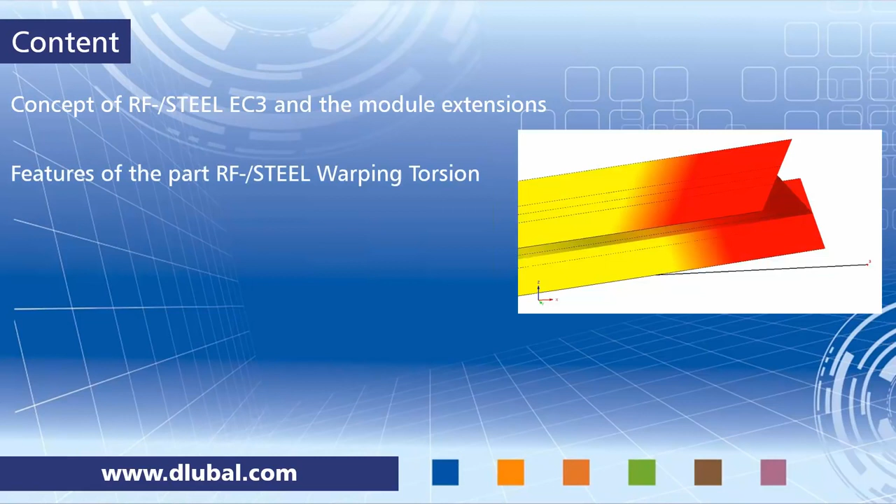We get started with the concept of the RF Steel module EC3 and its module extensions. I will then summarize a few features of the RF Steel Warping Torsion add-on module and the RF Steel Plasticity module. Then it's time for me to hand over the screen to Wieland, and he will show you an example in R-Stab, and he will perform stability design checks using the second order analysis and employing 7 degrees of freedom. He will also perform a plastic design in RF Plasticity.

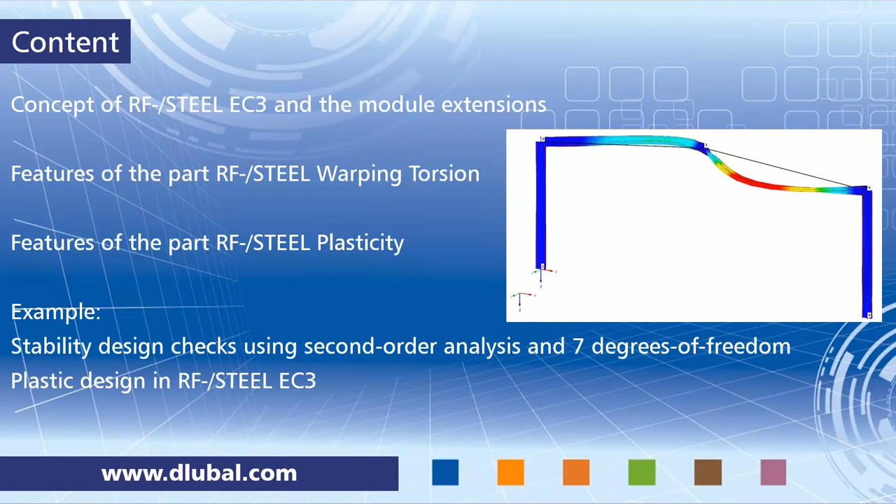Okay, let's get started with the concept. We have the add-on module RF Steel Eurocode 3, RF Steel EC3. Here you can design in accordance to the Eurocode 3. You can perform stability design checks. You can do deformation analysis, and of course you can also do some fire protection analysis. And together with this add-on module you can enable 2 different extensions.

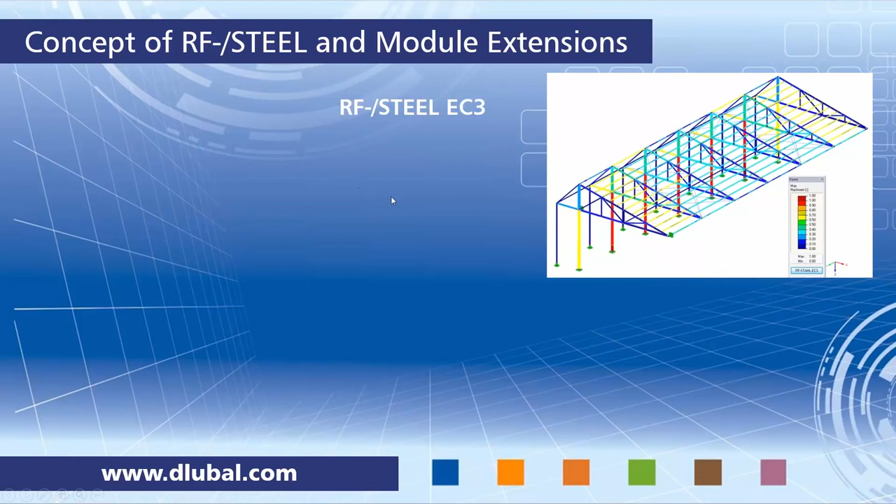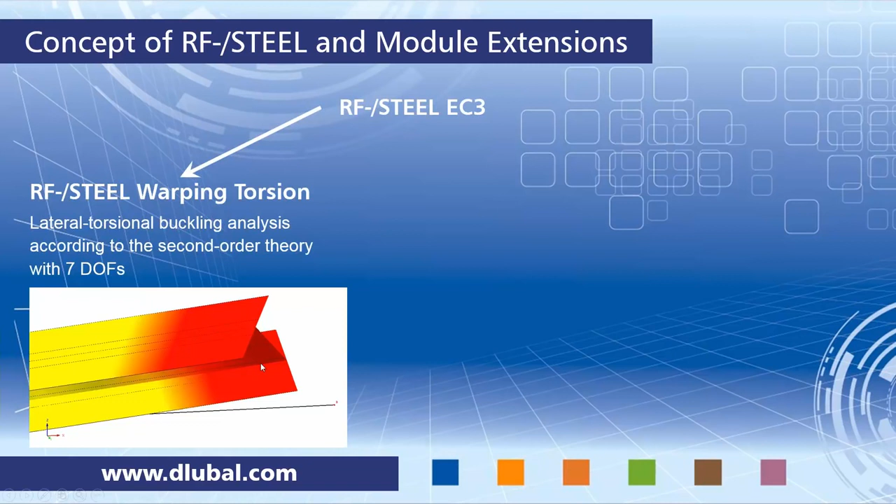One is the RF Steel Warping Torsion. Here you perform a design with the second order analysis under consideration of a 7th degree of freedom. That's Warping Torsion. And a second extension is RF Steel Plasticity. Here you can perform a plastic design of cross sections. They are both working either independently or you can use them in combination. And Wieland will show you this throughout the example.

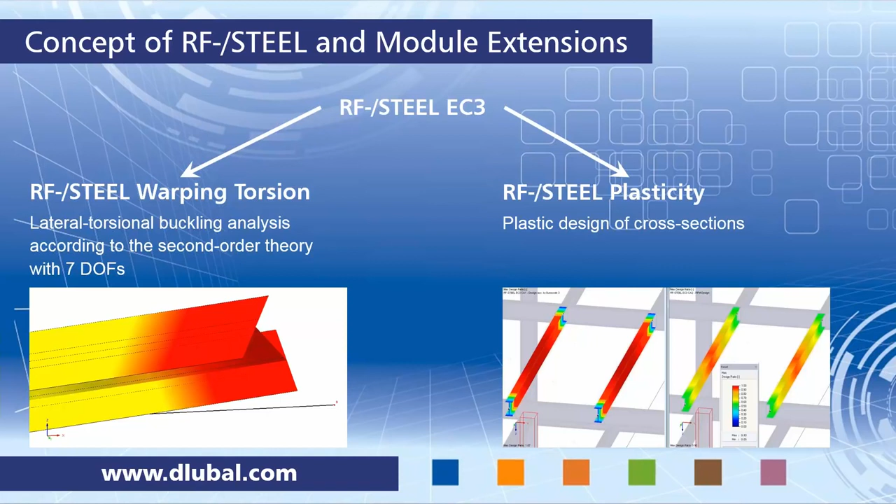To give you a bit more detail, here's a list of features of the Warping Torsion extension. So you have a standalone solver, and this is considering 7 degrees of freedom. The 7th degree is the Warping Torsion degree of freedom, beside the usual translational and rotational degrees of freedom. And it is performing a nonlinear analysis in accordance to the second order. You can enter imperfections, and in general this extension is available for thin-walled steel cross-sections.

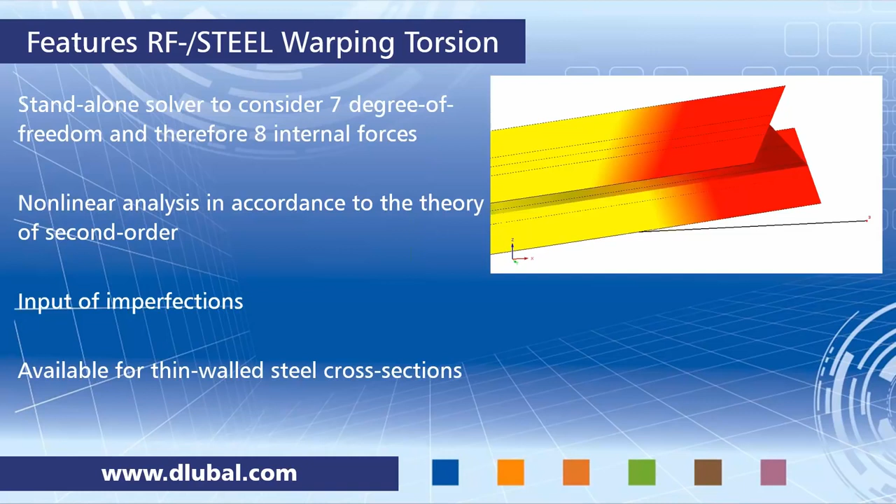For RF Steel Plasticity, we have different methods of analysis available. The main one is the partial internal force method by Kindmann and Frickel, and this method is suitable for nearly all types of cross-sections. This method exists with and without a redistribution of internal forces, and a second method available is the simplex method. This is for general cross-sections, and another type is the analytical nonlinear optimization procedure, which is used for elliptical cross-sections.

So it's now time already to hand the screen over to Wieland. He will show you all the discussed things live in R-Stab, and just a side note, everything that is shown and discussed today is available in R-Stab and RFEM. So the add-on modules shown today are available for both program families. So now I hand the screen over and enjoy the webinar.

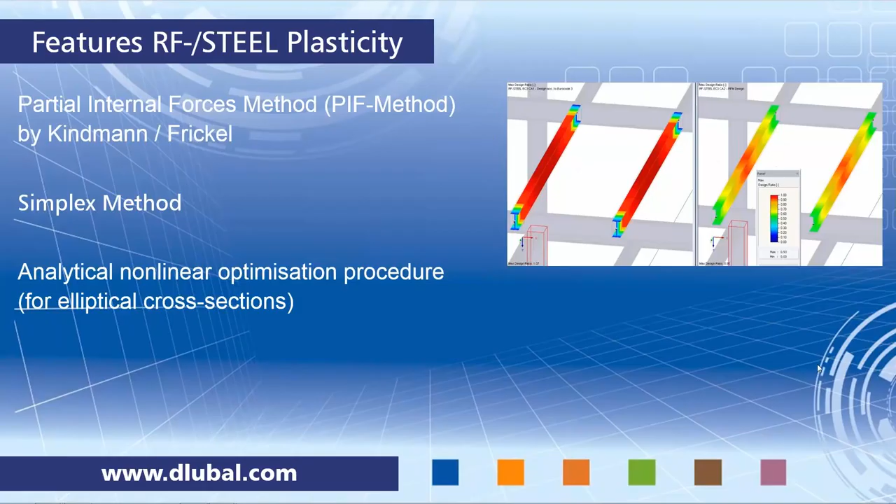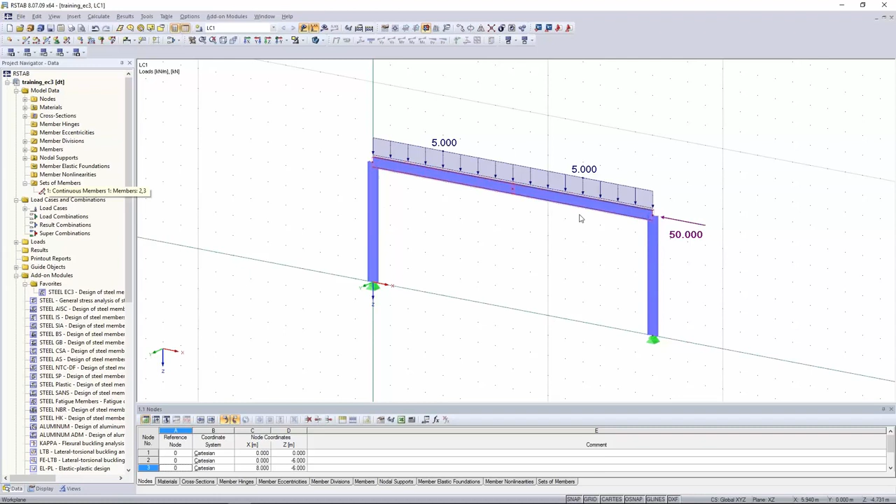So, thank you for the introduction, Gerlinde. Now it's time for the live presentation of this webinar, and I have already prepared the model to start with the Steel EC3 design. So you can see we have a very simple frame with a vertical and horizontal loading, just one load case, and I want to take a look at the horizontal beams which we want to design as a set of members. It's not just one single beam, it is divided by one node, so I had to prepare a set of members to use it as one element in the Steel EC3 design.

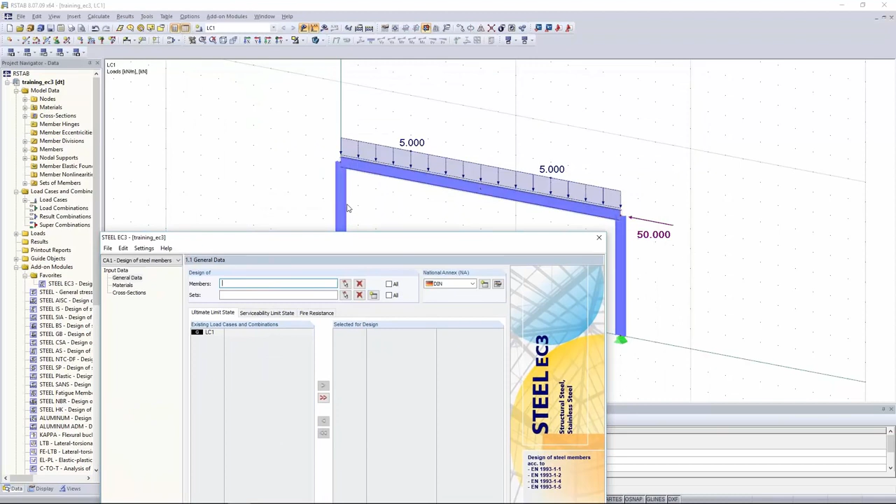Because some of you might see this module EC3 for the first time, we're going to start with just a basic design according to Eurocode 3, and then we want to upgrade to Warping Torsion and Plasticity later in this presentation. So I've opened the module Steel EC3. I have to select the load case which I want to design, which is the only one, LC1. I want to check my set of members, and today we want to design according to the EN version of Eurocode 3.

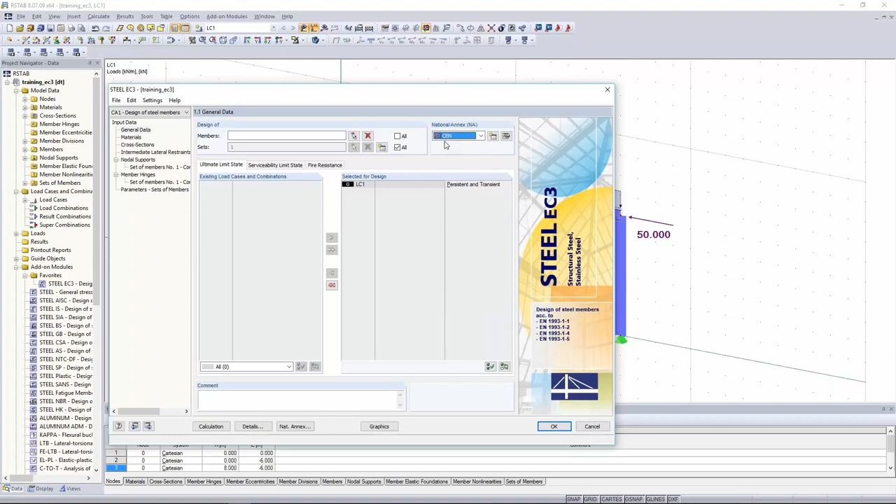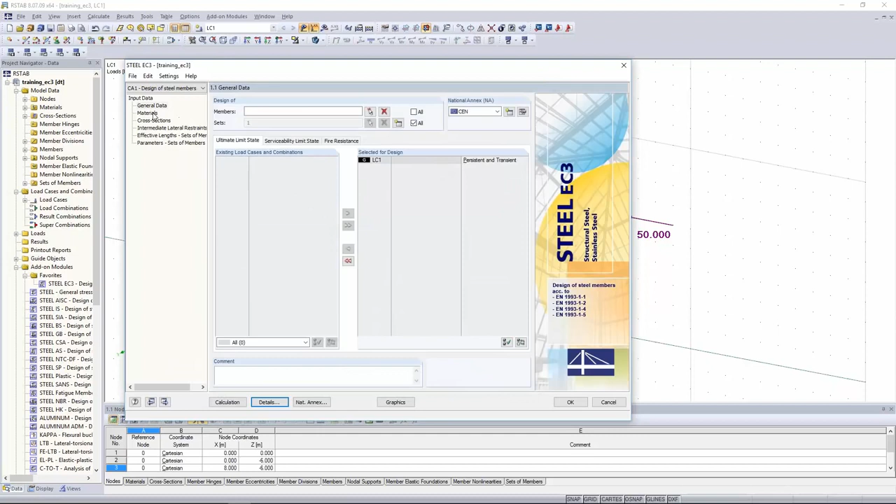In the first part of this design, I want to check this set of members not according to the general method. I want to design it according to the equivalent member method, which I can change in the stability dialog of details. Then I can continue to the next mask to check the material again, which is S235. This is fine. Cross-section is IPE 500 section.

I have no intermediate restraints on this horizontal beam, so I can skip this mask. Otherwise, you can prepare intermediate supports along this beam as you wish.

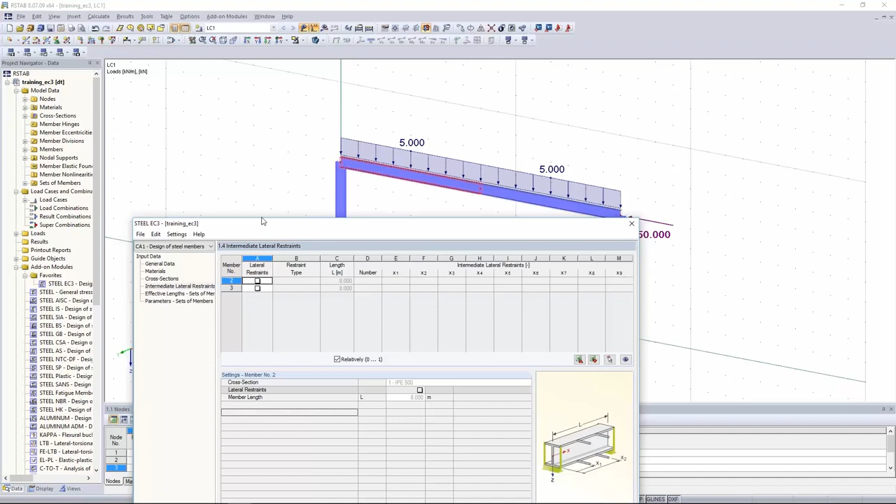In the next mask, which is effective lengths, you can define all the settings for buckling about the y-axis, buckling about the z-axis, and lateral torsional buckling in these columns. We want to keep it simple and design it as a simple fork-supported set of members. So all of these settings are already fine. We have buckling length factors of 1.0 in both directions, and the beam is simply fork-supported.

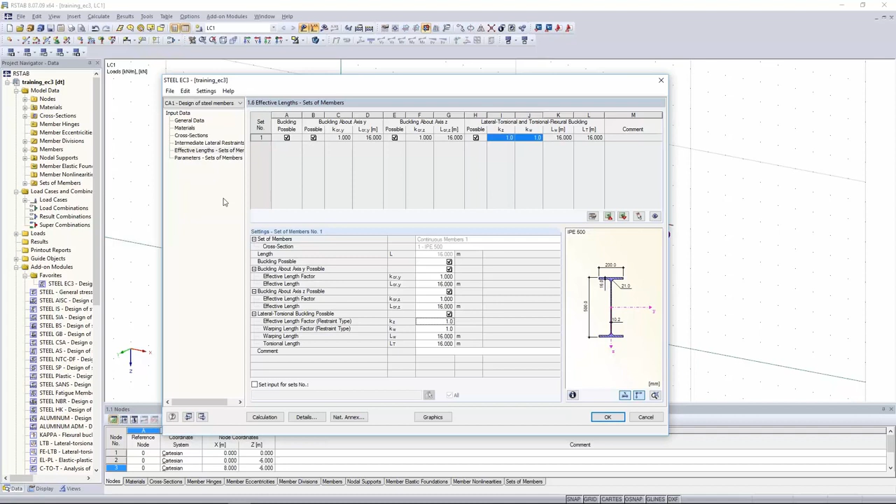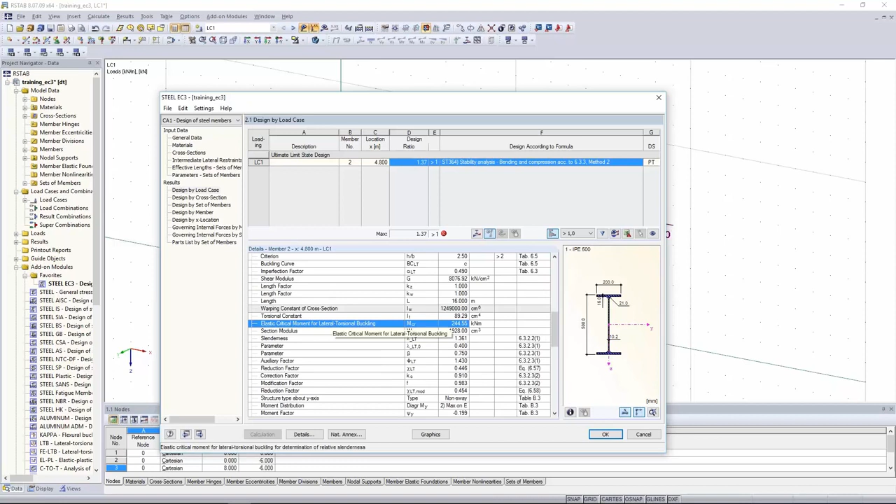So now I can just run the calculation, and you will see we have an overloaded horizontal beam, horizontal set of members here. We have a cross-section class 3, and you can check all the partial results in the design table on the bottom. So you have a part of the cross-section classification. You can see the critical buckling loads over there, and you can check almost every intermediate result in this table. You can export it, and also you can take a look in the graphic to check the results.

So there we have a class 3 section. I think this is at the x-location where there's no bending moment. Yes, so we have only compression force, and that's why the IPE section is assigned to class 3.

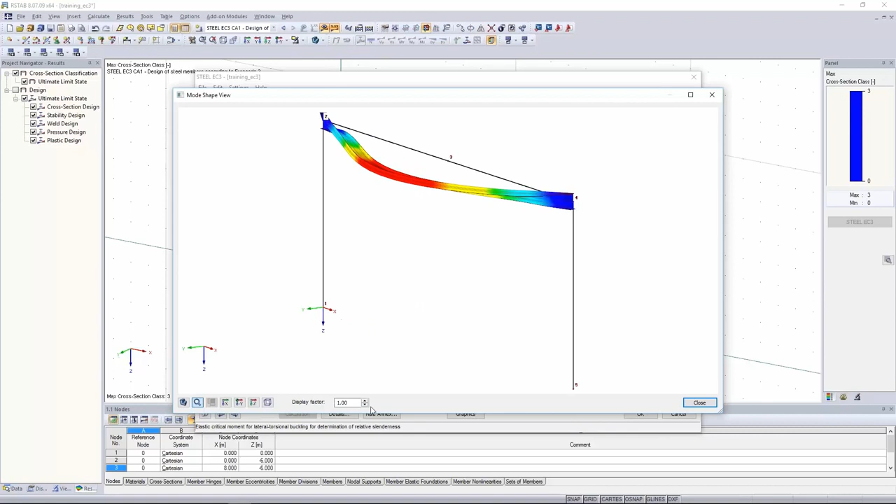Let's get back to the design module. If you want to check the eigenvalue solver, which is inside this module, to get the critical bending moment, M critical, you can click this button here, mode shapes, and you can see that there we have a lateral torsional buckling eigenvalue or eigenmode.

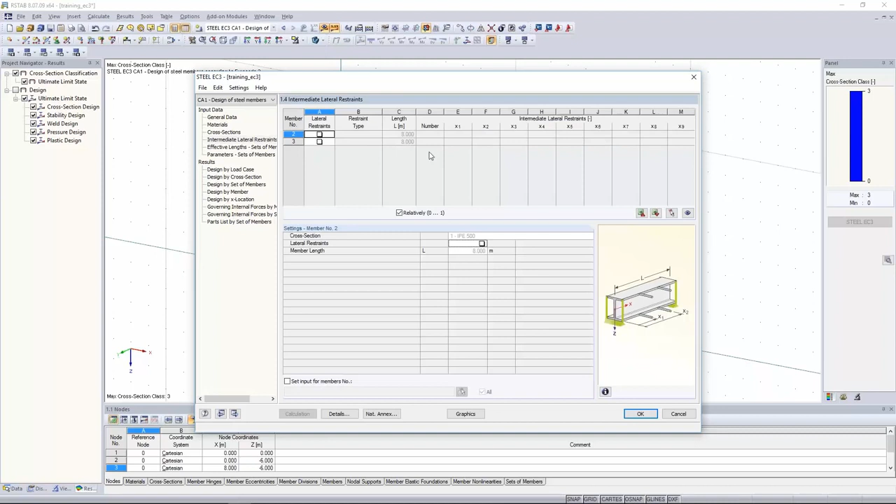And now the question is, how can I design this structure, or how can I stabilize it? Therefore you have several options. As I've said, you can place intermediate restraints as you wish, or in this example I want to show you the rotational restraint or the shear panel. For this example I will take the rotational restraint, and therefore you can change to the component description over there.

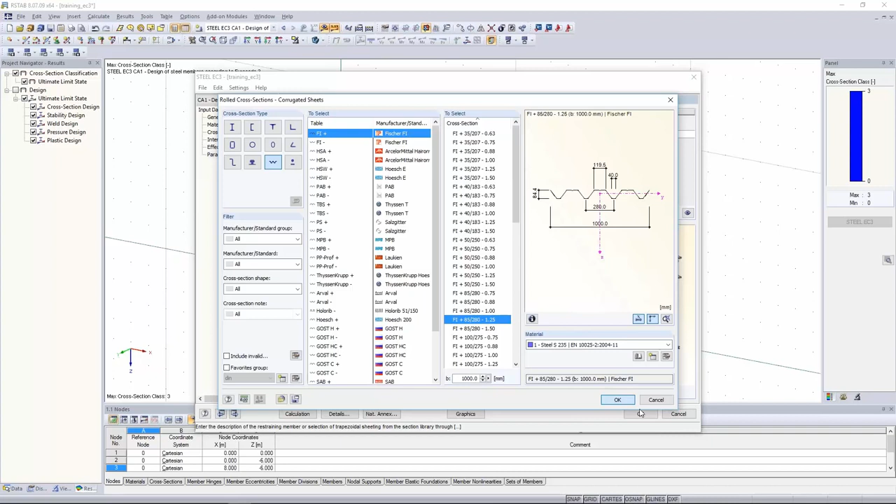And we want to take a trapezoidal sheet into account, which I can easily pick from the database. Let's say this is a Fischer trapezoidal sheet, 85/280, 1.25 thickness. That's fine. Okay. And the module will take into account all these values automatically. You just have to define a beam spacing, and maybe you want to change the C100 value according to Eurocode 3 Part 1-3.

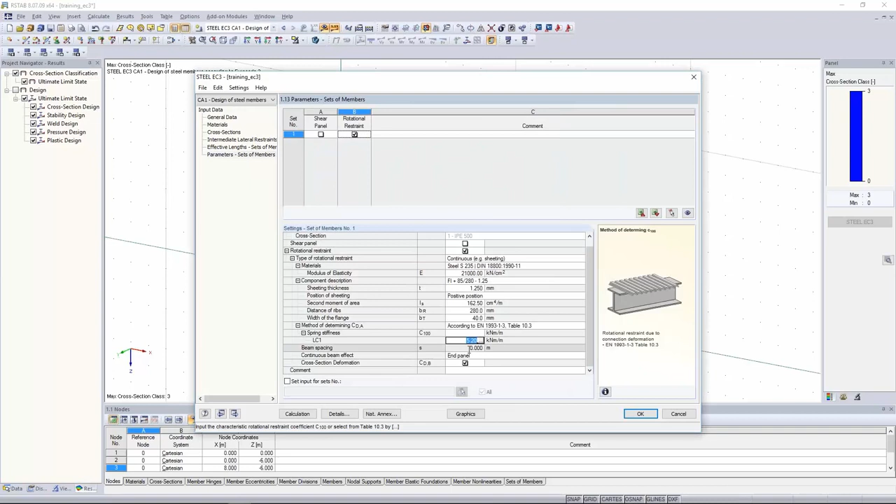Okay, I want to have a beam spacing of 5 meters, and then I can run the calculation again, and now you can see that this structure is already stabilized. We have a fulfilled design, and this is fine. You can also check the partial results of the rotational restraint over there up to the total rotational spring stiffness.

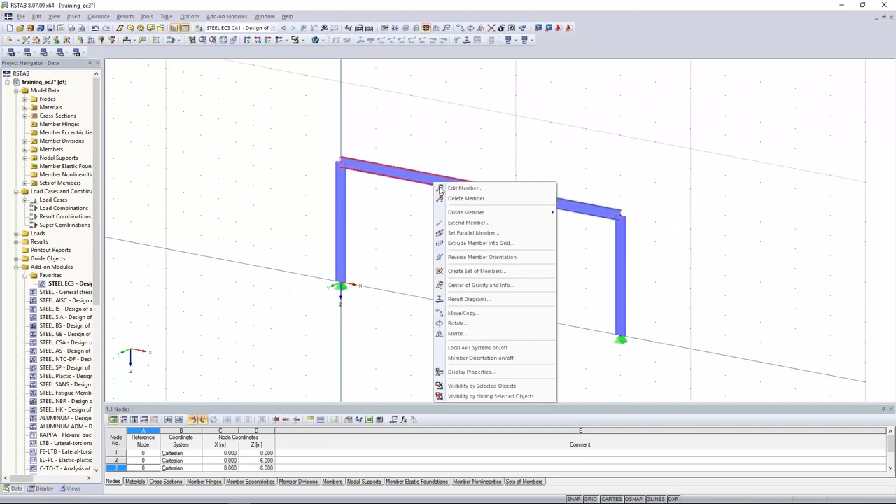All right. In the next step, I want to make a small change in the structure because I need some more space at the connection of the beam to the column. I want to prepare a taper at the beginning and at the end of the beam. Therefore, I just right-click on the member, edit member, right-click, divide member by distance, and I can easily change this value to 1 meter and this one to the same, divide member by distance at the end, 1 meter.

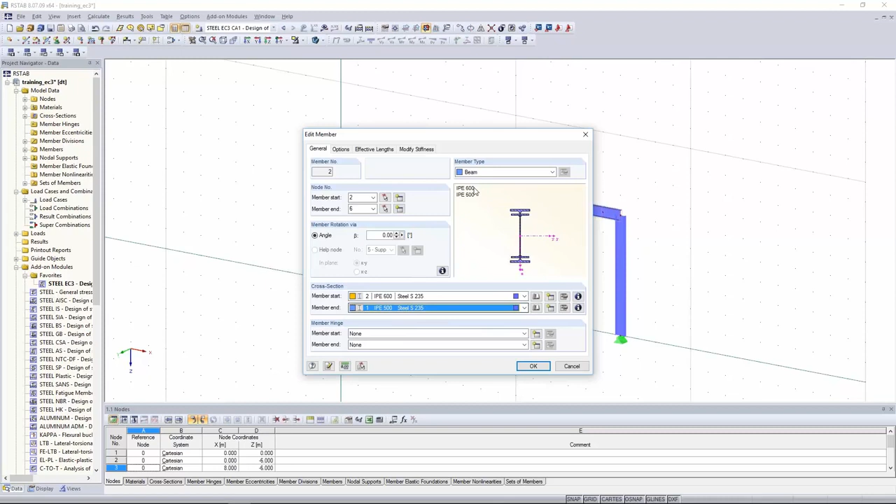To define the taper, I can just change the cross-section at the beginning, IPE 600 now, and IPE 500 at the end, and the program will automatically define the taper over there. Same thing on the right side, not at the column, on the beam. IPE 600 section at the end of the beam. Now I want to run the design again.

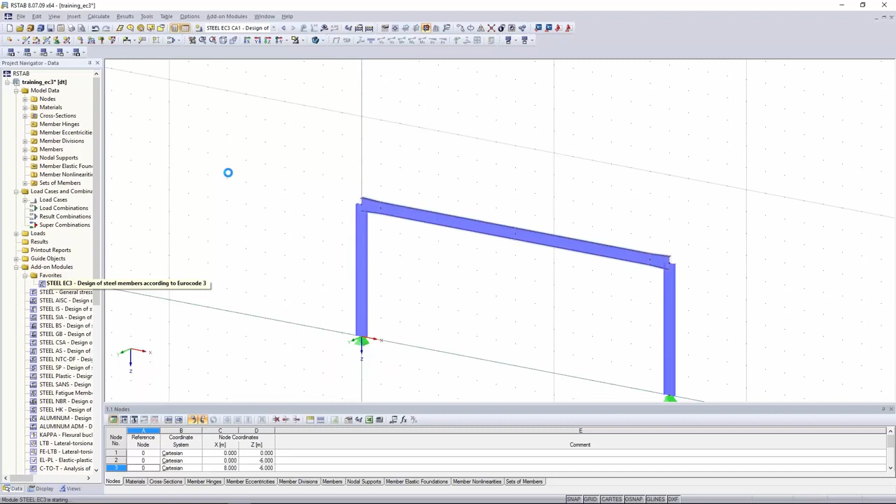The question is, in the first design we had a design according to the equivalent member method. We had bending and compression, and this is according to chapter 6.3.3 of Eurocode 3. And this chapter is only valid for uniform members. Now we have a tapered member, and we have to change this because it's not valid anymore. If you have a taper, you can use the general method.

Click on OK, and you will see for the set of members, it changed automatically to nodal supports. And this is a different method from the last one. It's not the equivalent member method. General method means you have a design according to chapter 6.3.4 of Eurocode 3, and therefore we have to place some nodal supports to get the equivalent system for the eigenvalue.

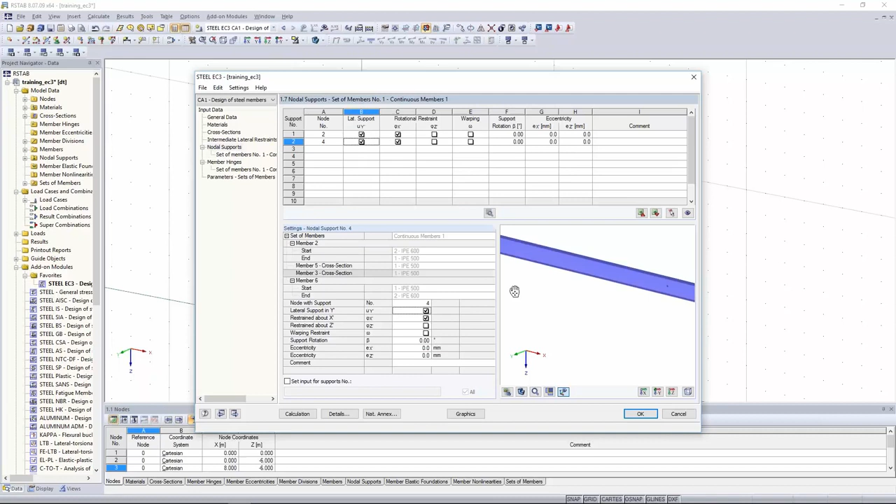You can check these nodal supports graphically in this view. As you can see, we have the whole frame over there, but by clicking on local coordinate system, you can change the view to the nodal supports, and you can check them. But in my example, these default nodal supports are already fine, and I can just design this set of members

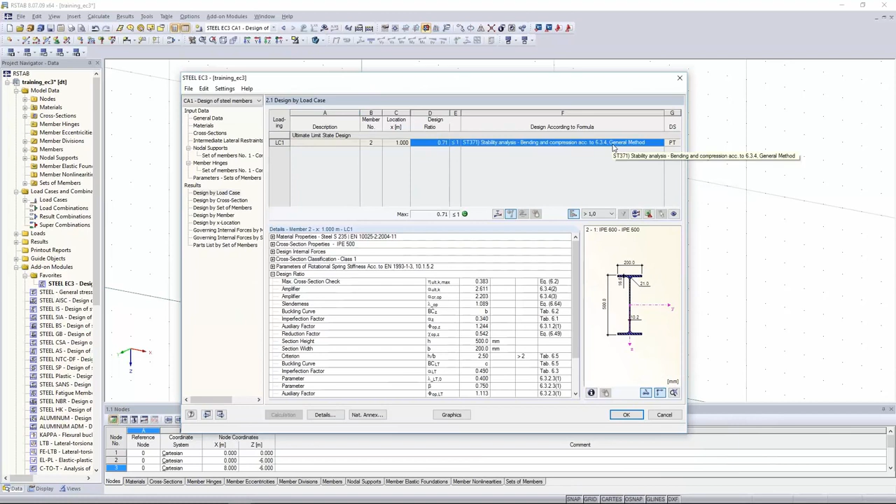by clicking on calculate. So also for the tapered member, we have a design according to the 6.3.4 general method, which looks a bit different. There's a small issue with the graphic there, but as you can see, it is also possible to have a design for tapered sets of members.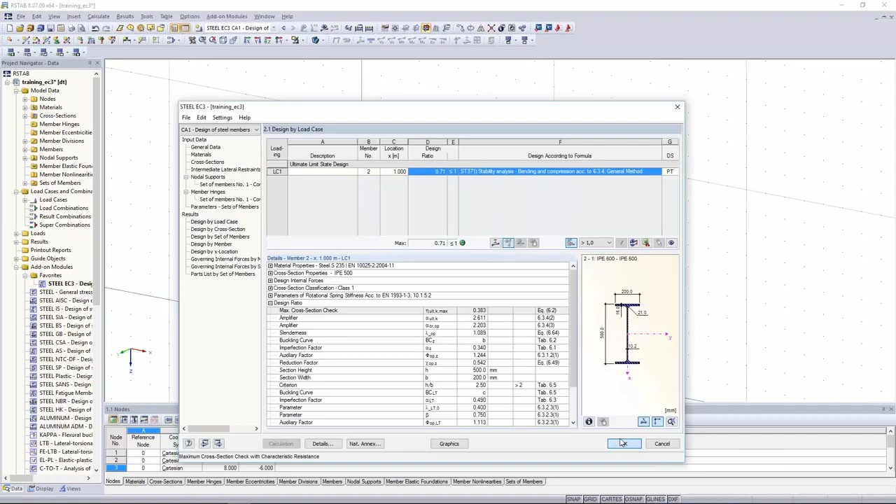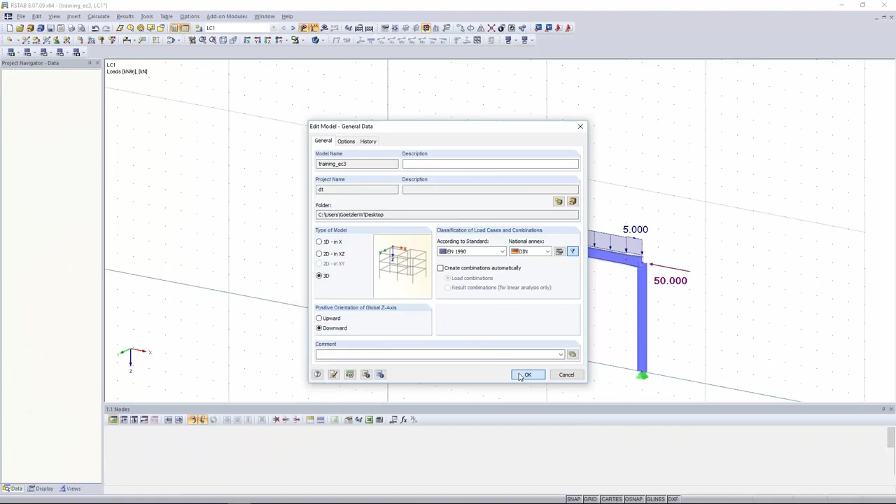Now we have to address a more specific problem of the structure. We don't just want to define the transverse loading and the horizontal loading, we also want to take some cross-bending into account, and therefore I right-click on General Data, change the structure to 3D, and have to define some nodal supports to support the frame out of plane.

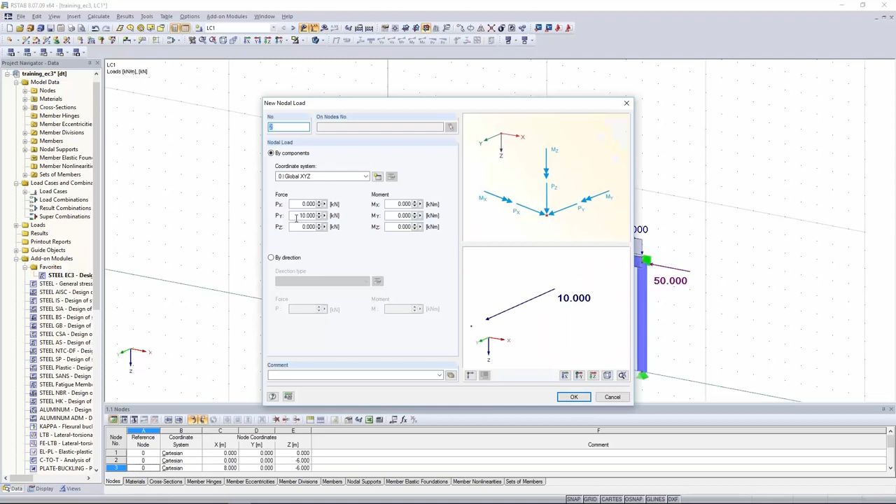And therefore I can just define the loading out of plane, which is 10 kilonewton in this example, in the center of this horizontal beam, which is quite a bad loading in this position, but we will see how to define it, how to design it.

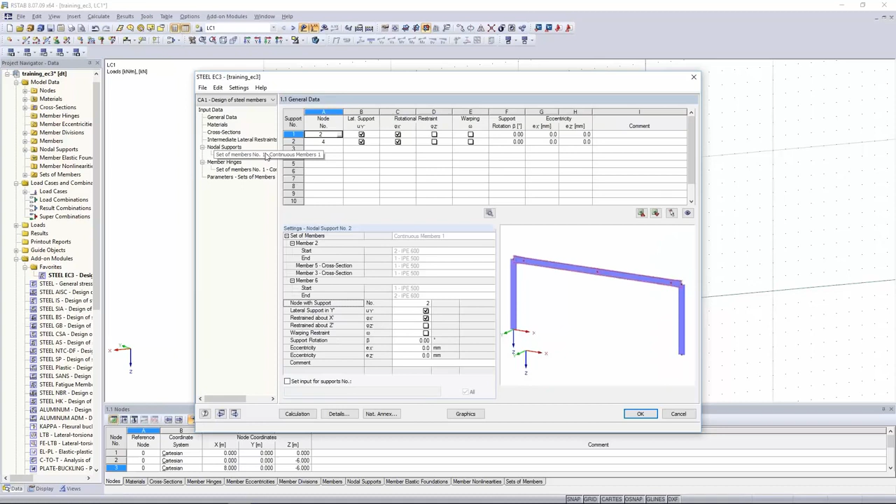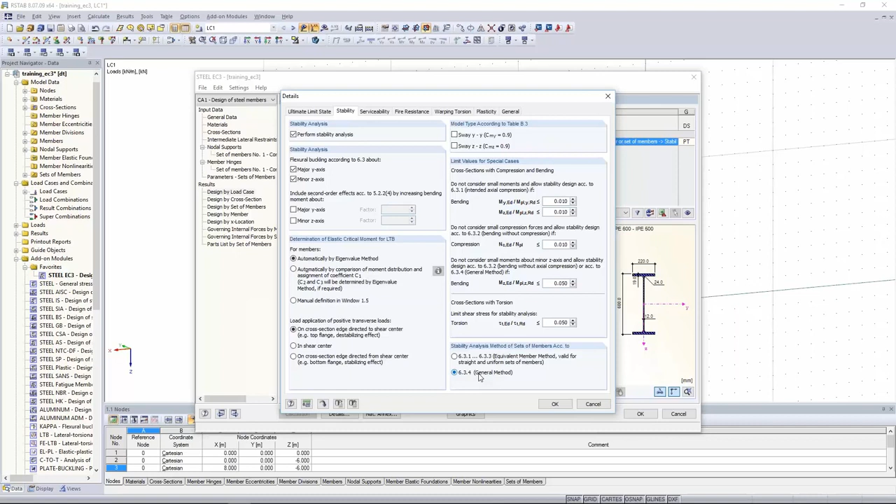First of all, we want to try to do the same analysis again, just by running the calculation again. But there's a warning message coming up, which says that there's a moment about the z-axis, of course, and this is not allowed for this design method. Yeah, the design according to chapter 6.3.4 allows only a loading in plane, and this bending moment Mz is due to a loading out of plane.

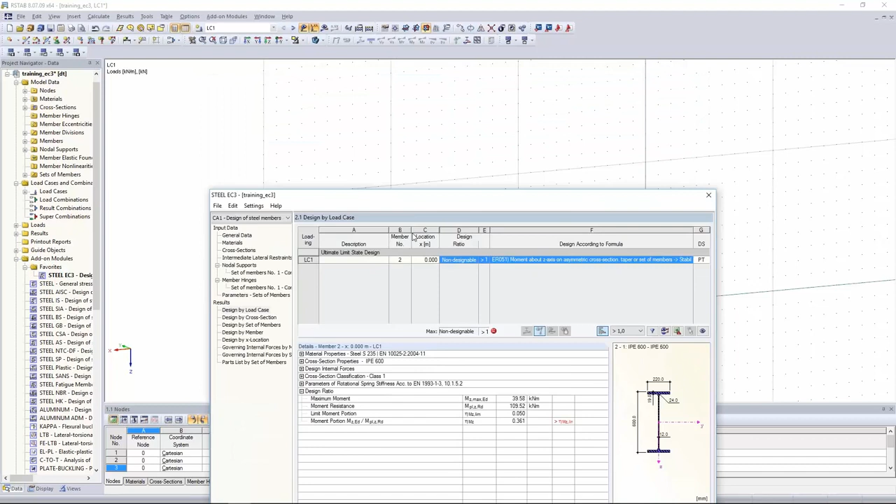And now we come to the problem where you probably need this new module warping torsion, because the question is now how to get this design done for this loading and this model. And there's one really easy solution in Steel EC3 now with this new module warping torsion.

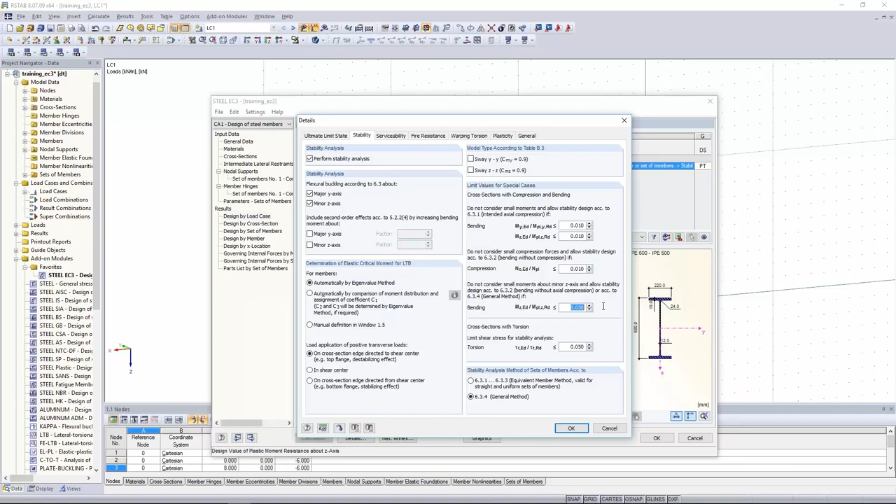You can see over there we have quite a lot of cross-bending with about 36% of the resistance and plastic. So we cannot say, okay, I want to neglect, let's say, 10% of the cross-bending over there. This is not a solution. The warning message will pop up anyway, and no, we cannot say, okay, I want to neglect the 36%. We have to take it into account,

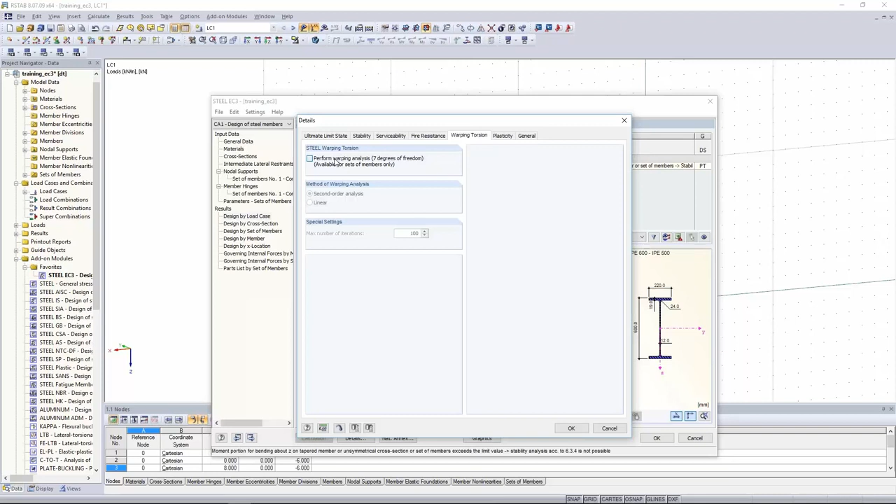and therefore I will just activate this new module, Steel Warping Torsion. In details, warping torsion, you can do this one. Over there, just activate the checkbox. Okay.

Now we can switch to the nodal supports again. And it's basically the same as in general method, but you can see that now we have not just 4 columns with 4 degrees of freedom for out-of-plane stability problems. We have all 7 degrees of freedom. That means all the deformations, all the 3 rotations, and the 7th degree of freedom, the warping.

We have to check the boundary conditions again, which is fine in this example, I think. Let me just remove the deformation in local x-axis. And now what we want to do with this module is we want to perform a stability design not with the equivalent member method or with reduction factors, χz, χLT, and so on.

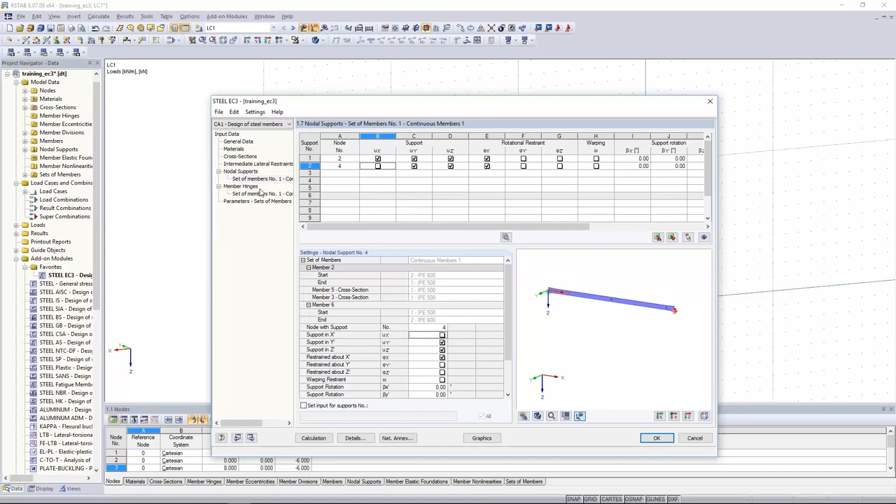We want to do a second order stress design, and there's a last question coming up now, and this is how to define the imperfection. Because for a second order analysis you need to define this one, and this is done by applying this initial bow imperfection according to the first eigenvalue or eigenmode of the structure.

Let's say in this example we want to do the design according to L/250 of the length of this eigenshape. And this is the value you will find in the national annex of the Eurocode. So in Germany, for example, there's a table where you can find this value which says, okay, you have H to B of the section bigger or smaller than 2, and you will find exactly this L/200, L/150, and so on in the table.

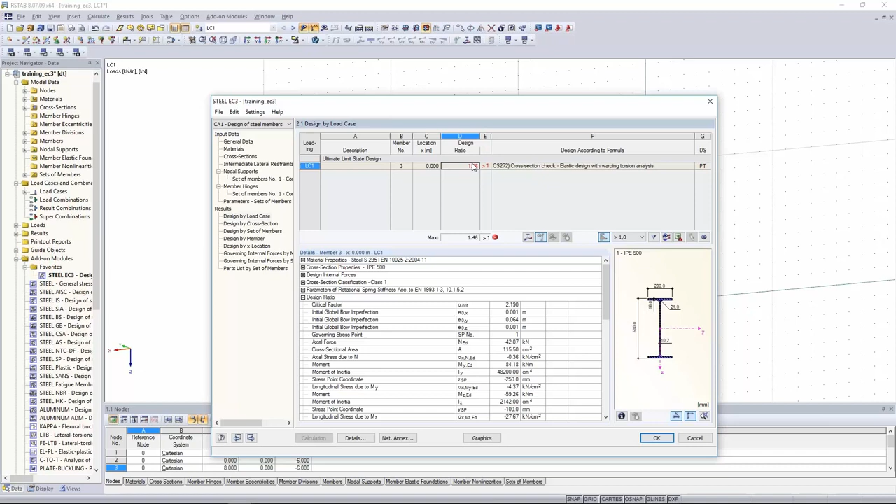And after we've defined this initial bow imperfection, we can simply run the design again, and now you can see there's no warning message coming up, but it's, let's say, slightly overloaded by almost 50%. Now we are around 146%. And in the bottom you can see we have the rotational spring stiffness taken into account. We have section class 1 now, and there's a critical load factor of 2, which seems fine.

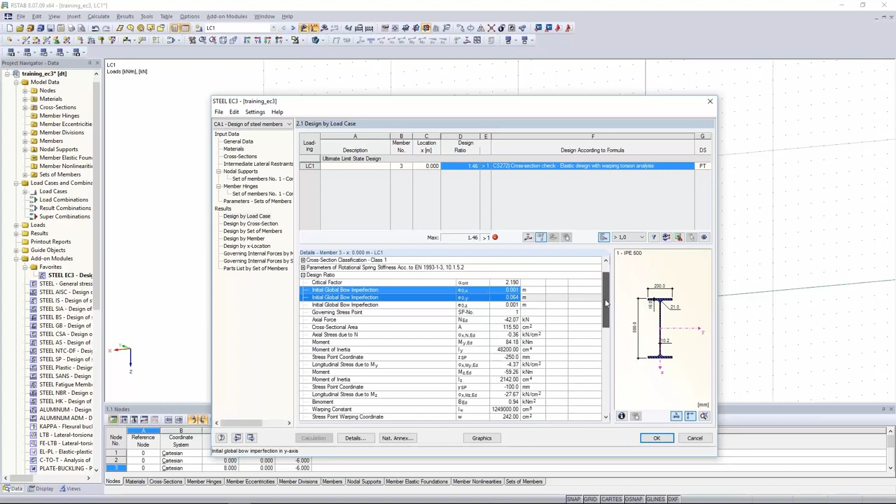The checking of the initial bow imperfection, and in the bottom of this table there's all the stress design. Yeah, you can see all the partial ratios due to normal force, due to bending moment, and so on, until you get the full design formula according to equivalent stress. You can check it also in the

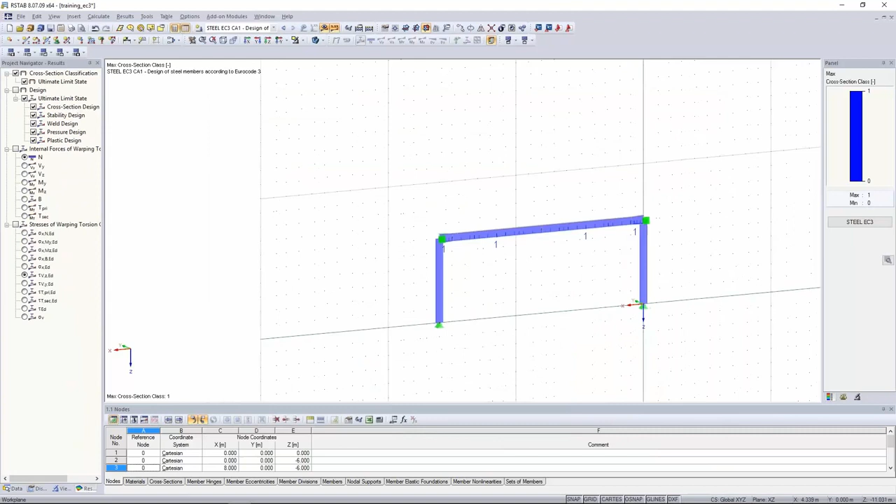graphic. This is the section classification, which is fine, but now we have just elastic stress design, so it doesn't matter if you have a section class 1 or 3. You can check the internal forces of this new calculation up to the bending moment and so on. And you can check all the stresses from normal stresses to equivalent stress in this tree on the left side.

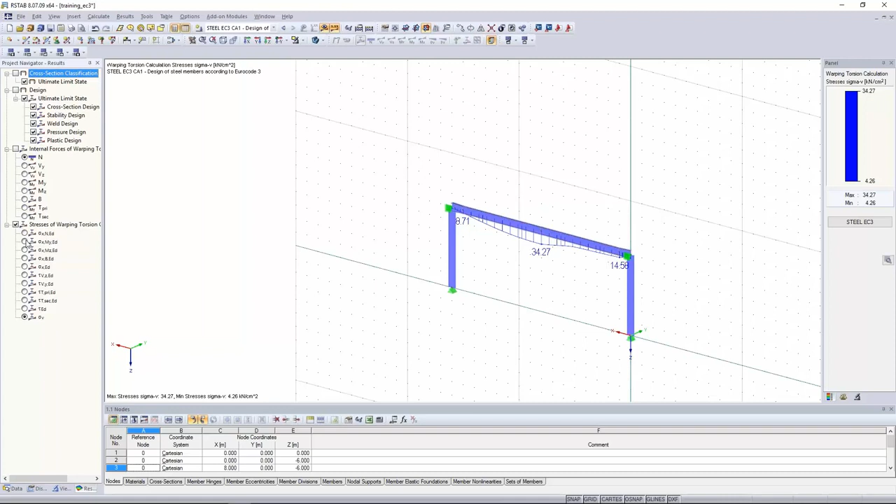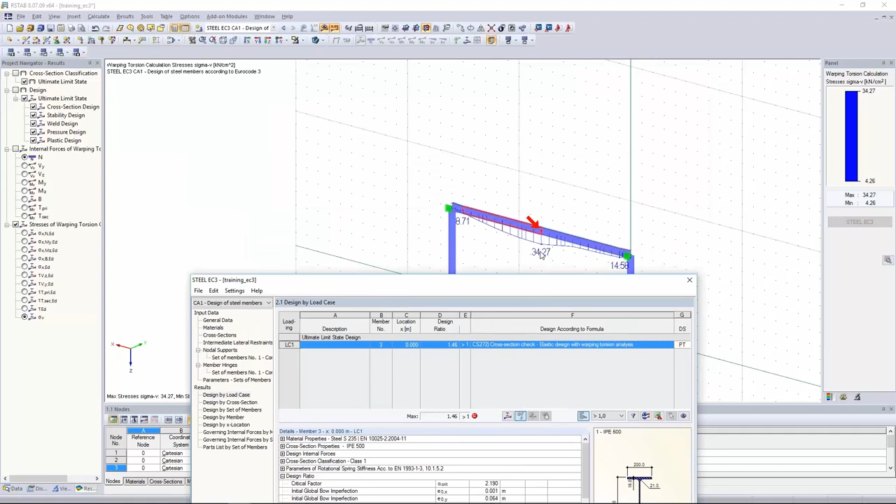So what this module is giving you is the opportunity to check all the critical cases in EC3 which you cannot design before. That means, as you can see, we have a bending around the weak axis on the tapered section, which is not possible to design according to equivalent member method. You can have a general cross-section, maybe from our cross-section program SHAPE-THIN, which you cannot design before that. All these cases which might lead to a warning hint, undesignable, these are possible to design now with warping torsion.

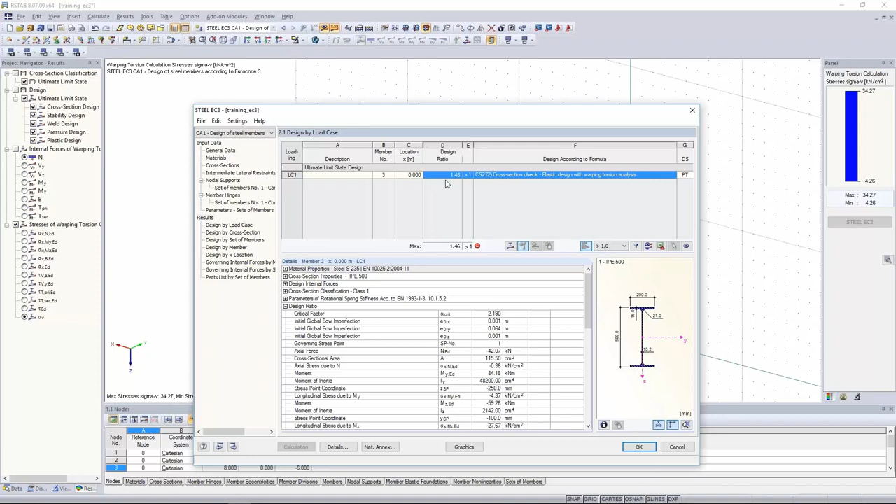To give you a better chance to get a better design, the next additional module, there's another upgrade called steel plasticity. This might help you to improve this design over there. Now we have about 150% loading, and we want to check if there's a possibility to get this design fulfilled somehow. And as I've said, we have this class 1 section, which is fine, but we only have an elastic stress design in warping torsion.

So what we want to take into account is the plastic resistance of the cross-section, and this is what we can do with the module steel plasticity. So I want to activate this additional part of EC3 module over there, and you can decide if you want to do a check for all the cross-section classes or only for class 1 and 2. And you can check also general sections like SHAPE-THIN sections, C, Z sections, whatever. You can choose the simplex method for these sections.

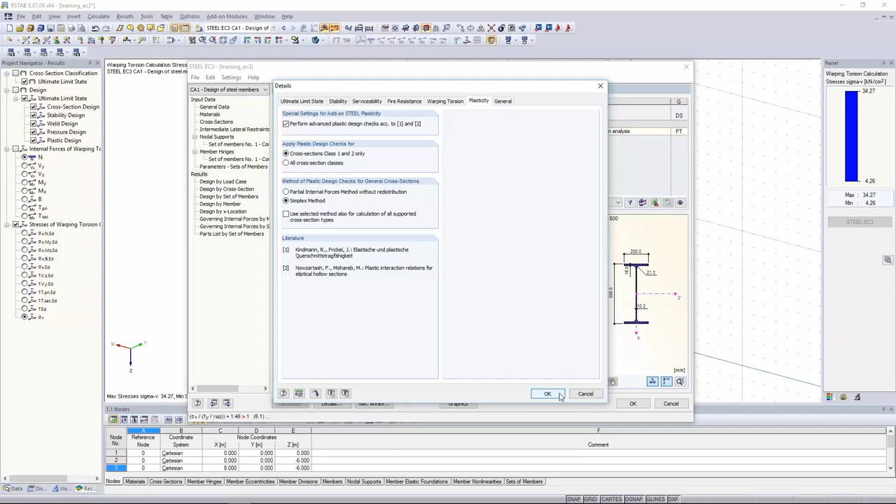Okay, and you don't have to do anything else because in details warping torsion is still active, so we will use the warping torsion internal forces to get the design done with the plastic resistance of the cross-section according to partial internal force method. And just by clicking on calculation, you can see that this design is now fulfilled. We have a plastic resistance of the section, and with the partial internal force method, it was possible to get this design done. And this is quite a nice feature.

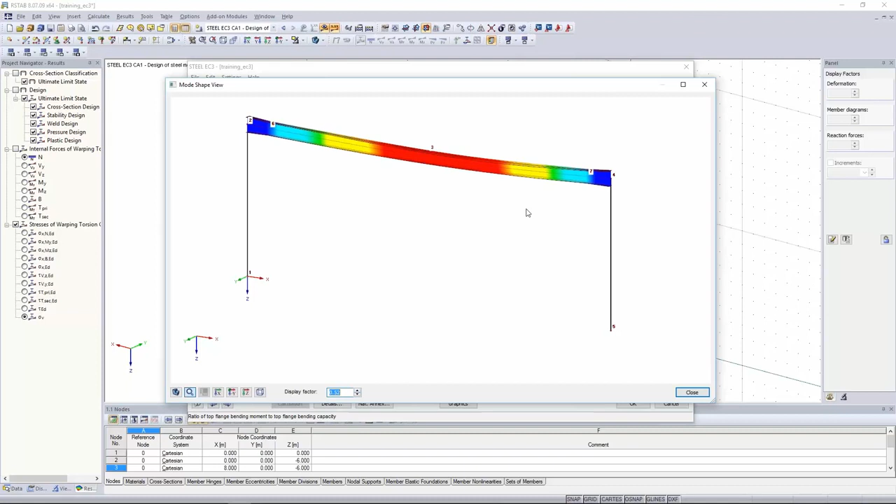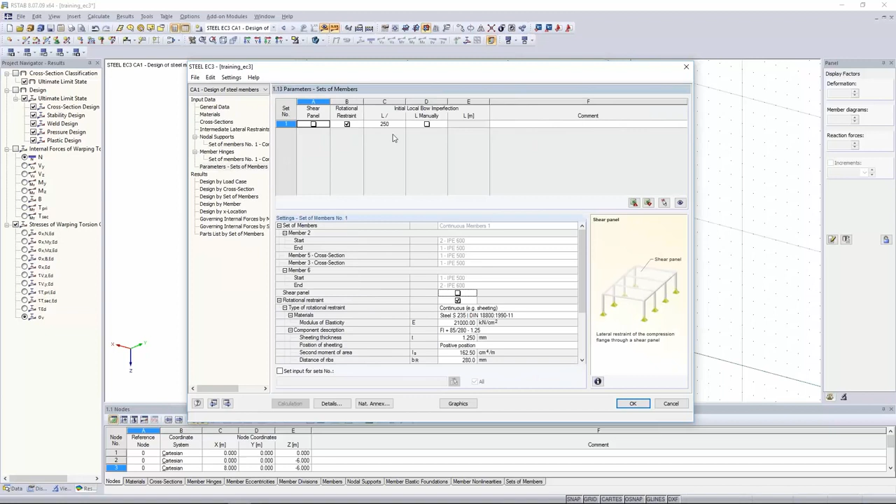So now also the eigenshape is working again, this graphic, and of course we still have a lateral torsional buckling eigenshape, but now it was possible to get this design done with the aid of warping torsion to get the second order internal forces with the aid of imperfections and with the module extension plasticity.

So let me just summarize a bit. The EC3 module gives you a lot of opportunities to get all the designs done for all the sections which are mentioned in EC3 code and all the loading which is mentioned in EC3 code. That means all the I sections, all hollow sections, and bending around all the axes and normal forces are not a problem in EC3 module.

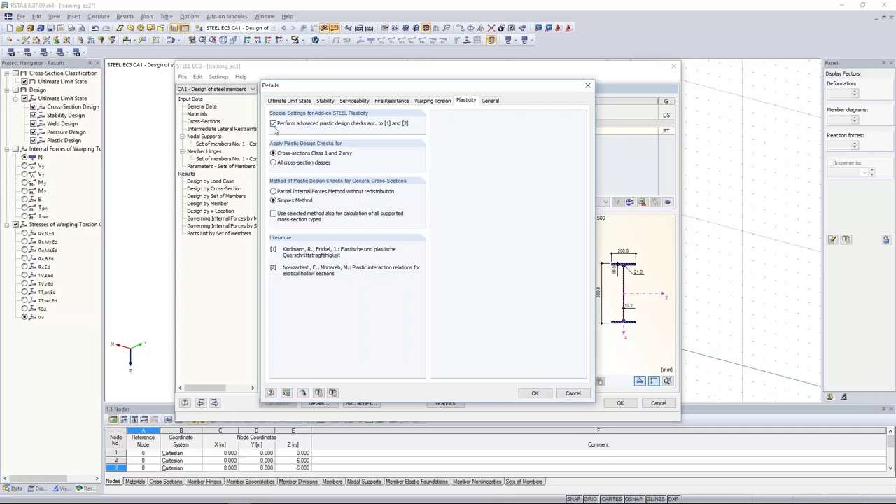If you have a bending moment around the Z-axis, if you have torsion, which is a big topic, if you have unsymmetric sections, SHAPE-THIN sections, all the general sections, and you have a loading with bending and compression, you might need warping torsion, and this gives you a solution to get the steel stability design done all in this module. And to get even the plastic resistance of the cross-section and take this into account for this second order analysis, you can choose also steel plasticity.

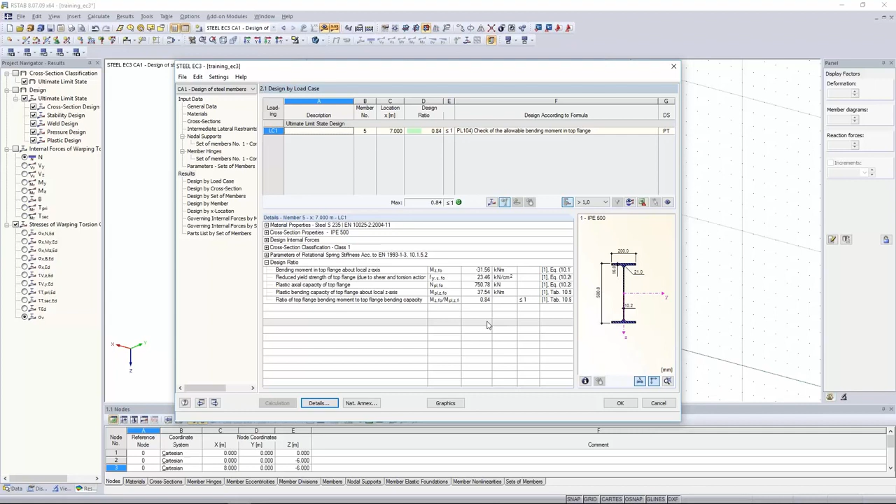Many thanks, Wieland, for the very interesting webinar. You also summarized the advantages very well at the end. With the Warping Torsion extension, you are able to design cross-sections that were non-designable beforehand. And with the Plasticity extension, you are able to use the plastic resistance limits.